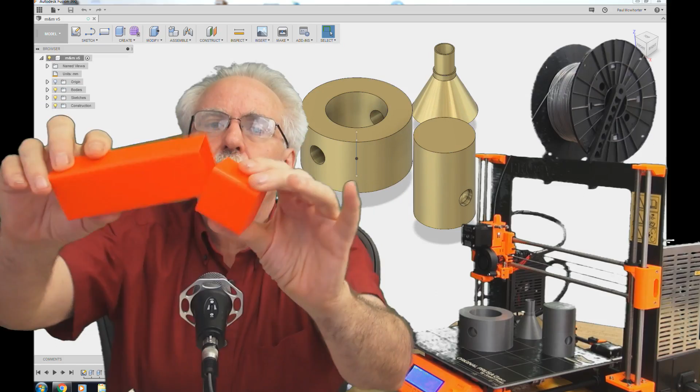What we are going to do today is design our first three-dimensional object. If you were here with us in lesson 1, what did we learn? We learned that the secret of success in Fusion 360 is becoming expert at our two-dimensional sketches. So we're going to work in our two-dimensional sketches and learn some more tips and tricks, and then do our first extrusion to create this excellent eyeglass container with a nice slip fit to protect our eyeglasses. I like this because it's a simple design we can do fairly quickly.

So what do we need to do to start a new design? We need to fire up 360, come up here to File, click on it and say New Design. Boom, we got a blank page to work on here.

Where do we start? We start with a sketch. How do we go to Sketch? We click on Sketch. What do we want to draw? That's kind of like a rectangle, so let's come down to Rectangle, 2-point rectangle.

What is this nonsense? It is asking me what plane I want to draw it on. I'm a math teacher, I'm old school - I want to draw in the XY plane. To me, Z is for thickness and XY is where we draw. X is red and Y is green, so we would click here on this plane, between the red and the green.

Boom! I have got a piece of graph paper and I'm ready to draw. Now we already have the rectangle tool because we did that to take us into Sketch, but if we didn't, we would just type R on the keyboard and it would give it to us. We come near the origin and click once, come out, click again. We now have a rectangle.

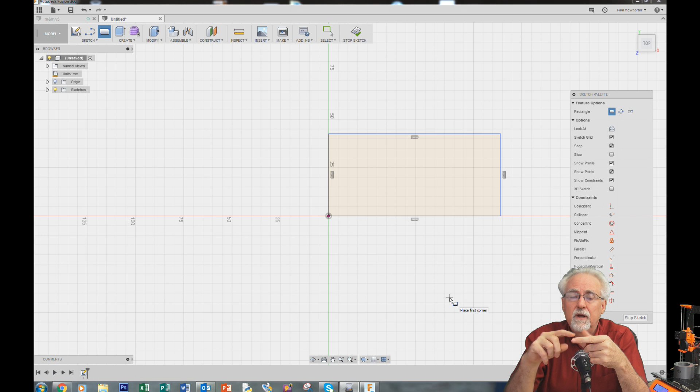The rectangle is in the right position, but it's the wrong dimension. So what do we do before we move on? We set the dimension. We are always mindful of dimension and position. This is in the right position, it's the wrong dimension.

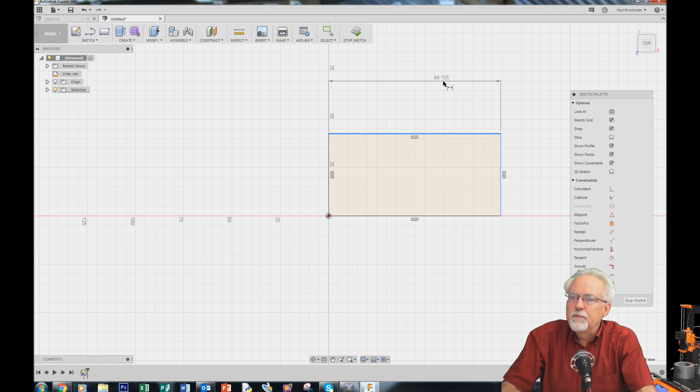So how do we change the dimension? I type D on the keyboard, and now it gives me the dimension tool. I point at this line, click once, pull it up - that does not look right, escape. I click D for dimension, select this line, pull it up, and then I tell it the dimension. The dimension is 42, enter. Now I have a rectangle, it's in the right position.

One dimension is right, what do I need to do? I need to set the other dimension. How do I go to the dimension tool? I can type D on the keyboard, or I could come under here, under Sketch, down to Sketch Dimension, click there. Now I have the dimension tool.

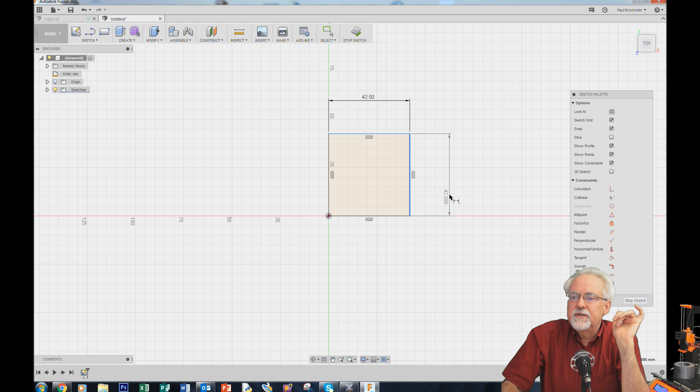What do I do? I point and click at this line, one time. Now I pull it out, and you see how I can move that around? I get it in a neat spot, click again, and now I tell it a dimension, 32. What do I have now? I have a rectangle - it's in the right position, and it has the right dimension.

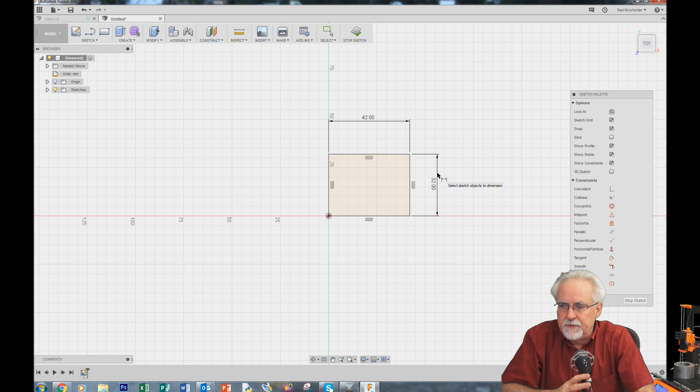This is the starting point of success - I'm mindful of position, and I'm mindful of dimension. Now let's think about this, I will zoom in here. How do I zoom? I zoom with the scroll wheel on the mouse, so I'm going to zoom in to get this nice and big where you can see it. All right, that should do it.

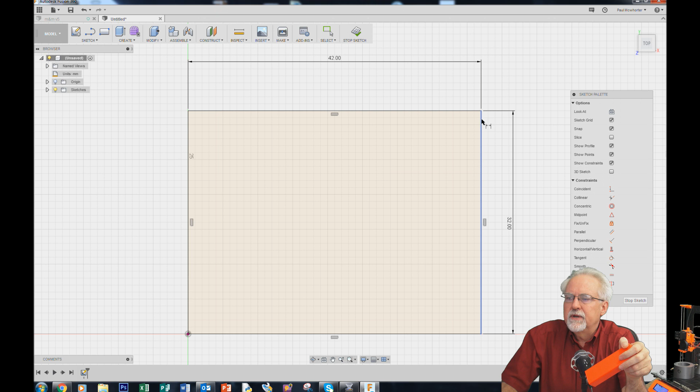Now, would you want a glasses case with a sharp corner on it that might cut your thumb? No, you want it rounded, a nice rounded profile. So how would I round that profile? There's a tool under Sketch called Fillet. Some people might say fillet, I'm going to call it Fillet. So I'm going to choose this Fillet tool.

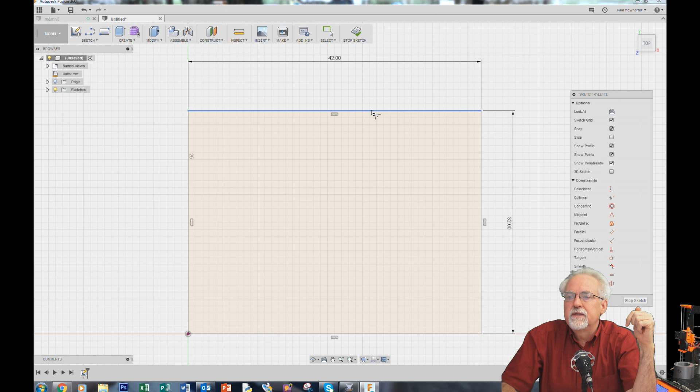Now what do I need to do? I need to tell it the first leg that I want to fillet, it's this one. And then I need to tell it the next leg I want to fillet, which is this one, and boom! It creates a nice rounded corner.

Now if you look in this dialog box, it is asking me for the dimension. We don't have to dimension it yet. Let's go all the way around, and then we will dimension it as a last step.

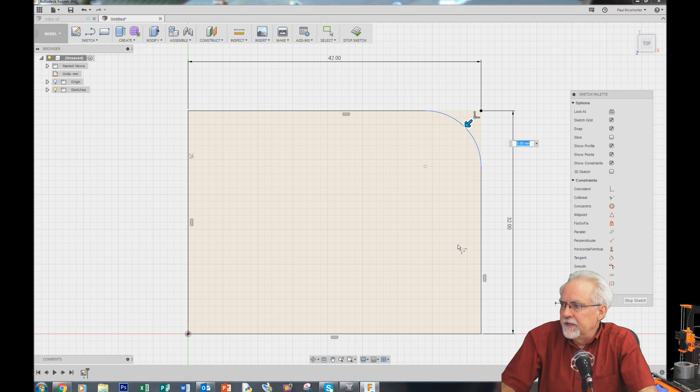So now I am still in the Fillet tool, so I click on this leg, and this leg I click, and now I have a second rounded corner. Now I need to do the third corner. I point at this leg, I click, I point at this leg, I click. I have 3 rounded corners.

Now I point at this leg, I click, I point at this leg, I click, boom, look at that. I have 4 rounded corners.

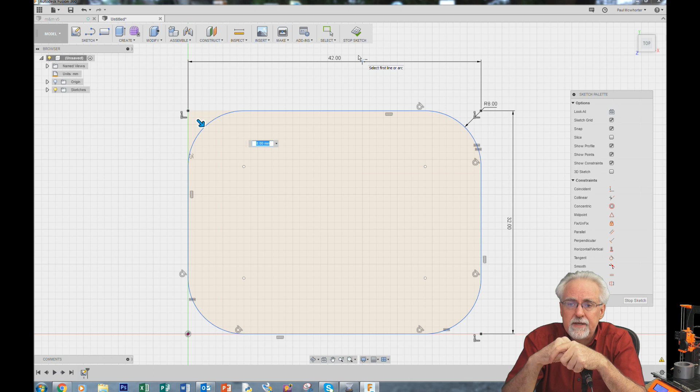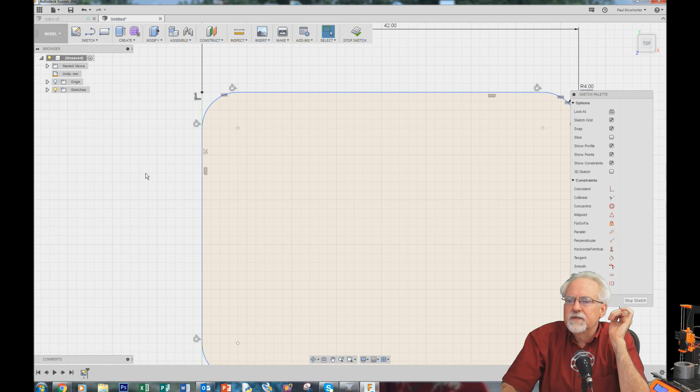Now it's still asking me for a size, and if I look at that profile, it's a little bit too rounded, becoming a little bit too oval. It says that it put an 8mm circle, a radius of 8mm on that curvature. That's a little bit too much. I'm going to try 4, and then I'm going to type enter, and then boom. That really looks nice to me. I am very happy with that, and I think that's a nice profile.

All right, now we've got the base that we need to extrude from, but what we have to think is, how many profiles do we actually have? Well, we have the outside of the whole box, which is shown here.

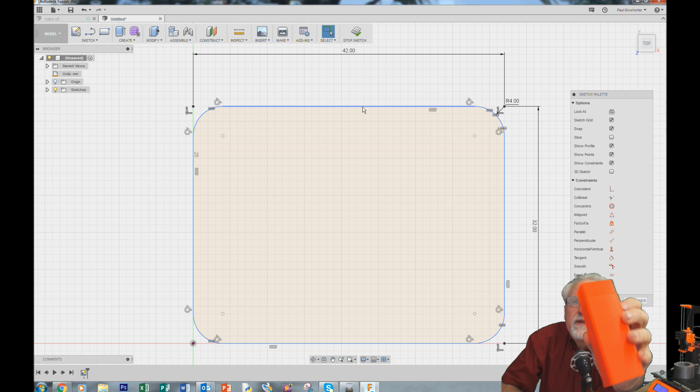We also, do you see that little lip on there? Do you see how we have a little lip? I think you can see it there if I hold it just right. That lip is in 1mm, so we need a second profile that's just basically this one again, but 1mm shorter.

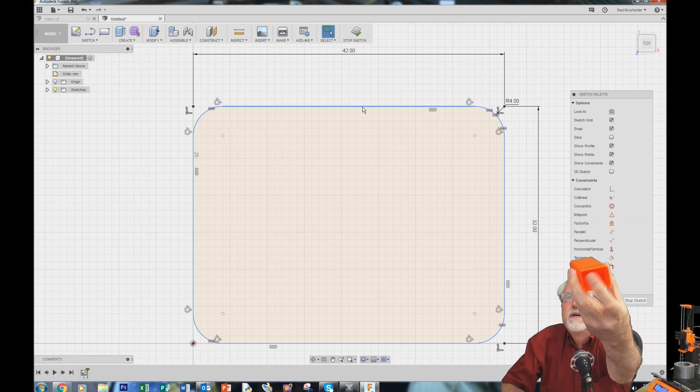And then we have a third profile, which is the entire inside diameter. So I have inside of the whole box, outside of the lip, and then outside of the whole box. So I need this profile 3 times. I have it once. How many more times do I need it? I need it 2 more times.

Now I could come in and just draw the whole thing again, a little bit smaller, but there is an easier way to do it. We come under sketch. We're going to learn something new here. We use the offset tool, so we get offset.

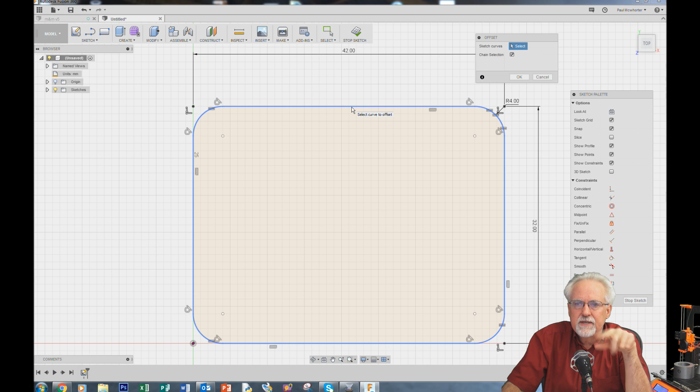Now what it wants is, if you look at this dialog box, it says select what you want to offset. Well, I want to offset this profile. You see when I point at it, it selects the whole circumference. So I click on it, and then it guesses, I bet he wants one 1mm bigger. I don't want one 1mm bigger, I want one 1mm shorter, which would be, instead of 1mm offset, it would be -1mm offset. Click enter, boom, look at that.

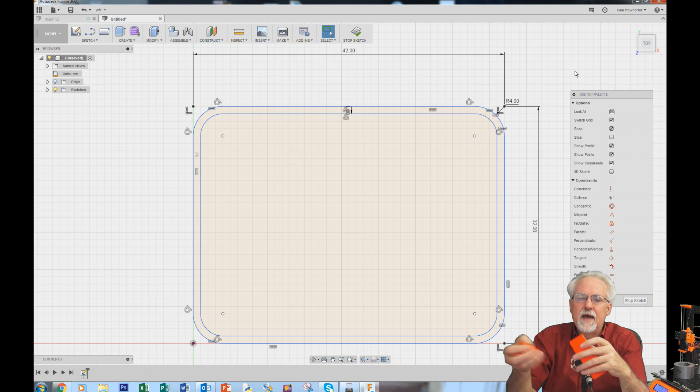So that is kind of like what would be the outside of that lip. Now what do I need? I need the inside. That's offset another millimeter.

Important tip: you would be tempted to say offset from the offset another 1mm, but don't. It's good practice, always go back to the original and offset from that. So you don't want to offset from an offset from an offset. We would want to offset from this original again and offset 2mm.

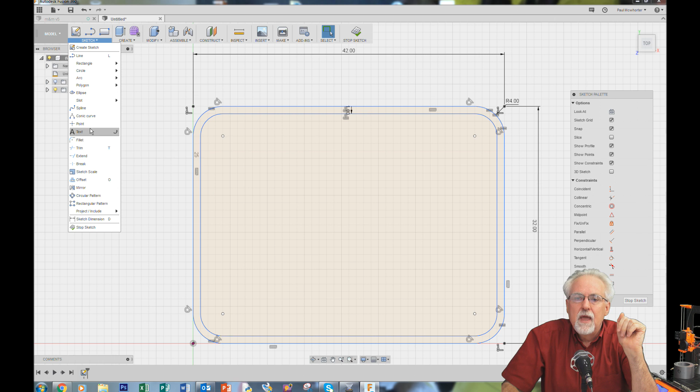So what do we do? We come in and we offset. We select this, and then what do we want to come in this time? -2. -2. Boom. And so we now have the profile that we need to build the bottom part.

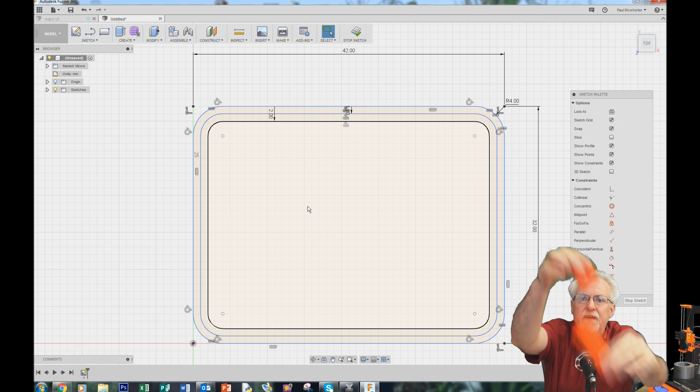Instead of jumping in and just starting to extrude this, why don't we think ahead? We need a top and a bottom. The profile of the top is going to be the same profile. You have the outside, the inside of the lip, and then the inside of the whole thing. So we basically want a copy of this.

I'm going to show you how to copy and paste. We are always mindful of position and dimension. I have all the dimensions, but I need to think ahead that I'm going to have to put this somewhere. So I need to give myself a point to align to.

How do we get an alignment point? The line is your friend. I click on L for line. I come to the origin, I click, and then I come out here and I click again. I need to click the check mark to tell it I'm done drawing a line.

Now I need to click D to dimension that. I want to dimension this, and I think I want to come out about 52. I'm going to click again, and say 52. All right, that looks pretty good.

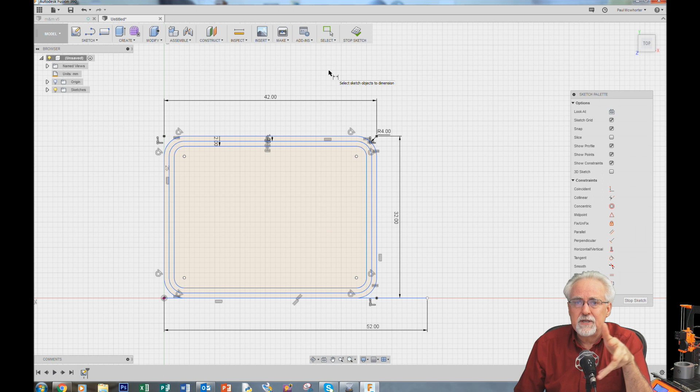So I want another one of these with the corner right here. And also what I have to remember is that line right now is a physical line, like a real object, like a string, an item in my drawing. I don't want it to be an item in my drawing. I just want it to be a guide point, a navigation point, or a construction point. So how do I change that?

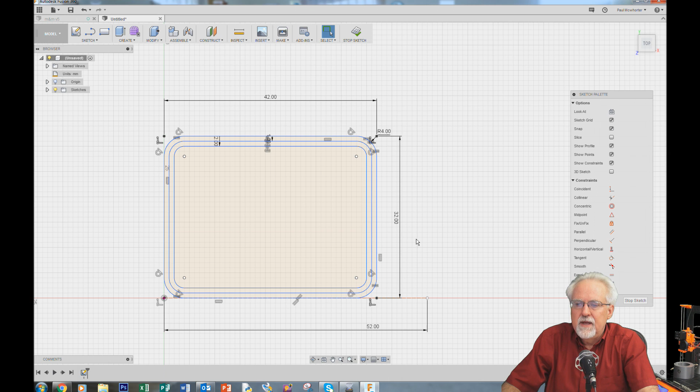I get the selection tool, come down here, right mouse click, and then I want to say it is a normal construction line. Now it makes it a dotted line, and making it a dotted line means that it's not actually there. It is just giving me a marker that I can align to.

How do we copy and paste? I'm going to zoom out and zoom in. I'm going to select the whole thing, click, drag, unclick. Now point at it and right mouse click. What do I want to do? I want to copy it. Now I have a copy.

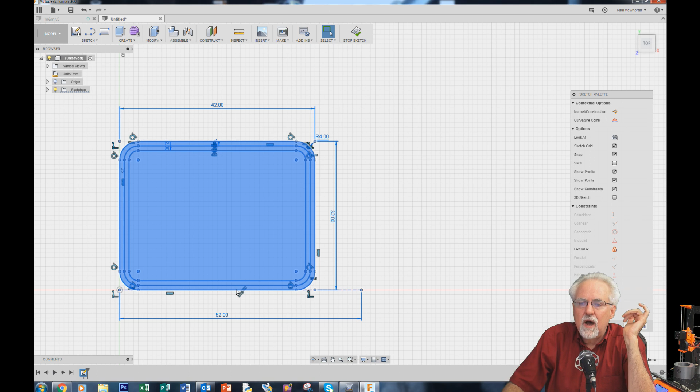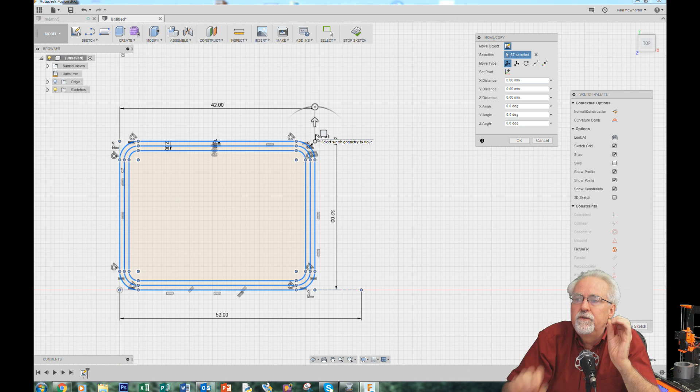I'm going to click off of it. Now right mouse click. I want to come down to paste and click. Now don't touch anything, because it has pasted the new one directly on top of the old one. If you click off of this, you're going to have two that are so perfectly aligned you can never get them separated. So right now it's very important to move them. It says, hey buddy, I gave it to you on top of the old one, but you better move it somewhere else.

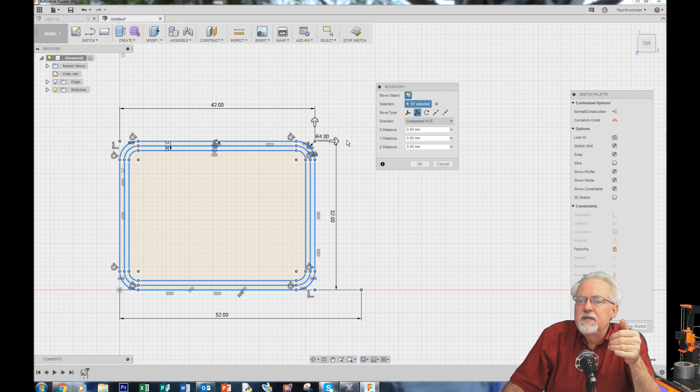Where do you want to move it? Well, I can move it in a free move, a translation, or a point to point. I think I will just move it in a translation, so I'm going to click translate. Do you see how it gives me these nice move it right and left or up and down options? So I'm going to move it like this, then zoom out, move this out of the way, move it again, and keep moving it.

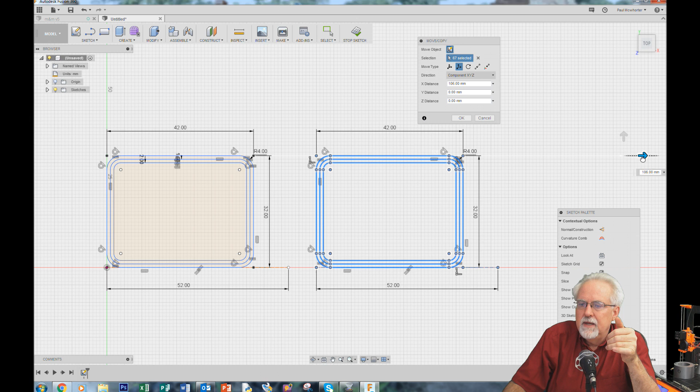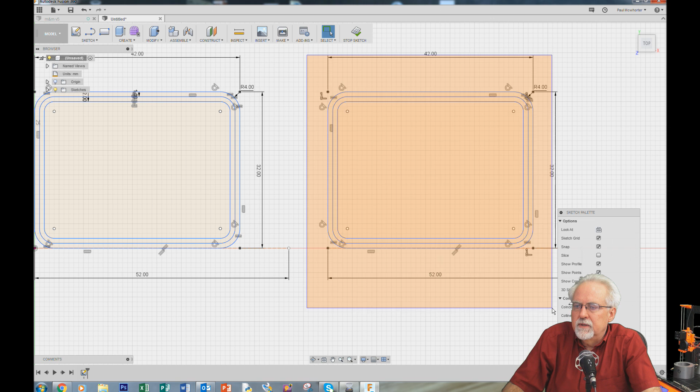It sometimes kind of gets away from you here, but don't worry, there we go. Now it looks like I have this lined up with this. That looks like a great place to put that. Let's see if I really got that. So now you can see I did not quite get that at the point that I wanted. I am going to select it again, right mouse click, and say move.

Okay, I'm going to do a point to point move, and I want this point here to move to this point here. Boom. Now I have it exactly at that point, because I put that point there for a reason, and when I started doing that drag, I kind of ended up with it in an arbitrary position, but now I have it exactly where I want it.

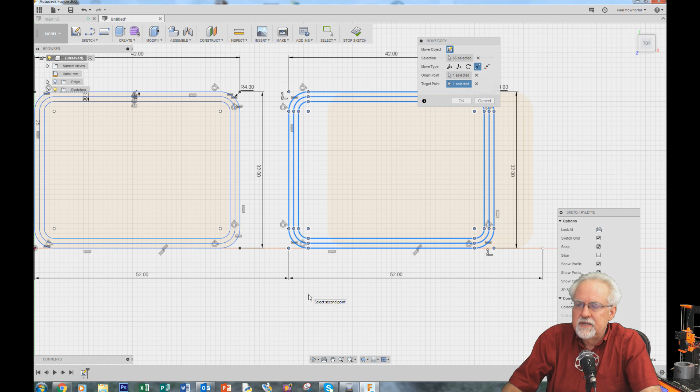I click OK. Now what I could do is come in and start doing my extrusions. But what I want you to see is, it would work that way, but we're learning about how to master the sketch level. So I'm going to show you a tip here. If I came in here and said 32, what's the problem? Now all of a sudden the base is not the same size as the top. Can you see that you would really want the base and the top to be the same?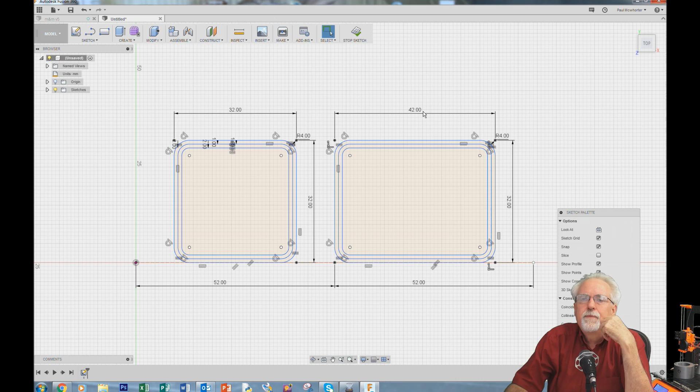And if I change this, you would want this to change. So you would really like these two things tied together. So what I'm going to do is go back and put this at 42. And I am not going to do things the way that I just did them. I'm going to show you a better way.

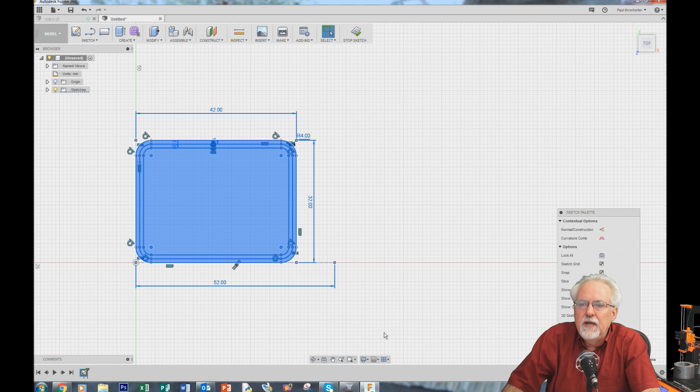So what I'm going to do is come in and select all of this, and delete it. All right, now I'm just back to my original one. What I want to show you is that we can select all of this. We can come under sketch and do a rectangular pattern.

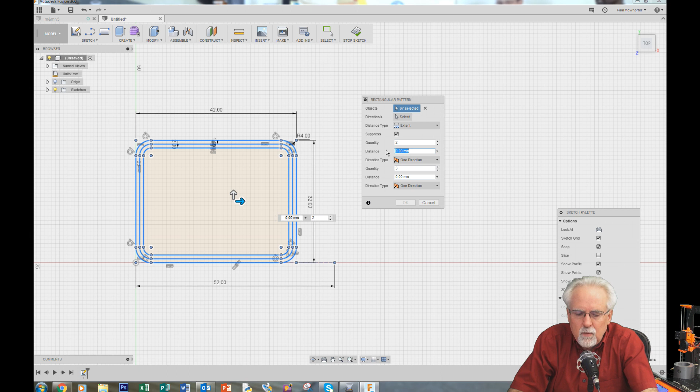This dialog box comes up. It says, how many do you want in the horizontal direction? Well, I want 2 in the horizontal direction. How far do you want to offset this? I think I want to offset it by 52 millimeters. That would put it right where I'd put this point, at 52. I tell it 52 there.

Now this is lined up with this, so I'm just being deliberate about position. And then it's asking how many do you want in the vertical. Well, I only want 1 in the vertical because I want 1 here and 1 here. That's all I want. Okay, and now I click OK.

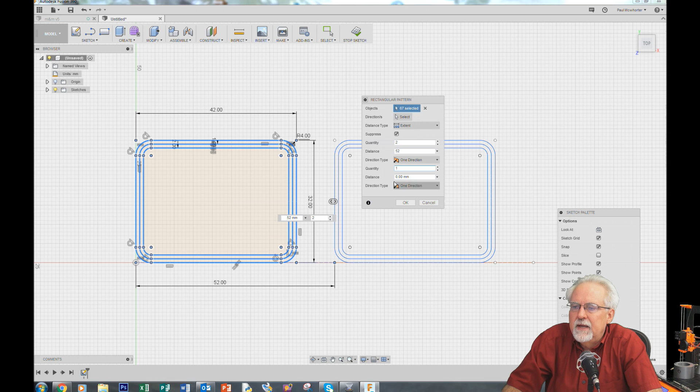All right, now what do I have? I have this one, and now I have this one. What do you notice about this one? It doesn't have any dimensions. Why? All the dimensions are tied to this one.

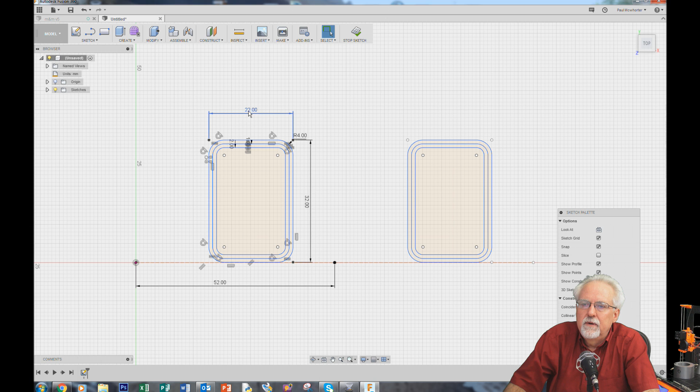So if I come over here and say 22, look at that, it changed both of them. If I come here and say 42, it changed both of them. What if I come in and say 12? Fixes both of them. What if I come in and say 32? Fixes both of them.

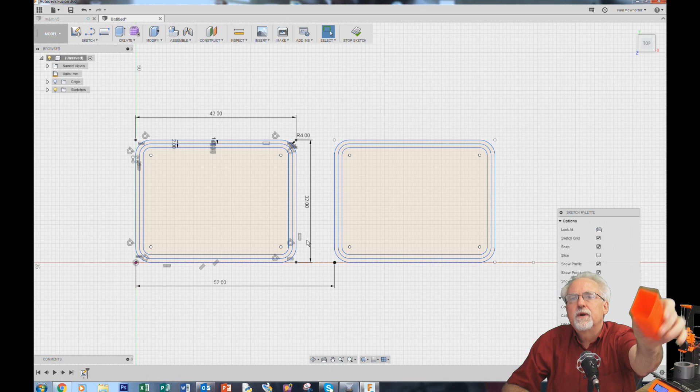Now what's nice about that, if you save this file and later you want a different dimension, you just change that one dimension and everything else is going to change. Because if you see, I set the outside dimensions to 42 by 32. This inside one was not set as an absolute dimension, it was set as an offset from the outside one, so those changes propagate through in a way that you don't have to redesign the whole thing. So this is very nice.

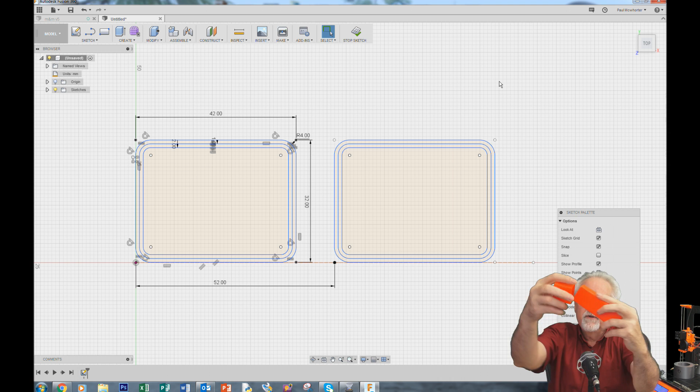Boom, we are where we need to be. I've got two profiles, one for the bottom and one for the top. What are we ready to do? We are ready to start extruding. And so how do we extrude? We come under here at Create, and then what we want is this Extrude tool.

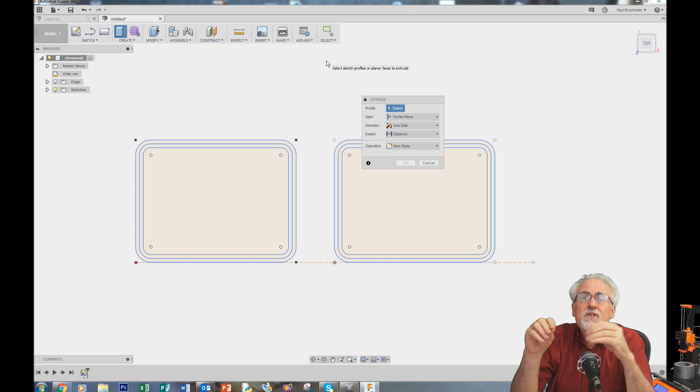Okay, so now it is asking me, what do I want to extrude? Well, first of all, I want a little bit better angle to look at this. So I want to orbit a little bit, rotate a little bit. How do I do that? I get the Rotate tool, I click, I come over here, and I rotate where I can see this. I like that. Now what I can do is right mouse click and say OK. Now I am back to my extrude menu.

It was just like I ran over there to get a better view.

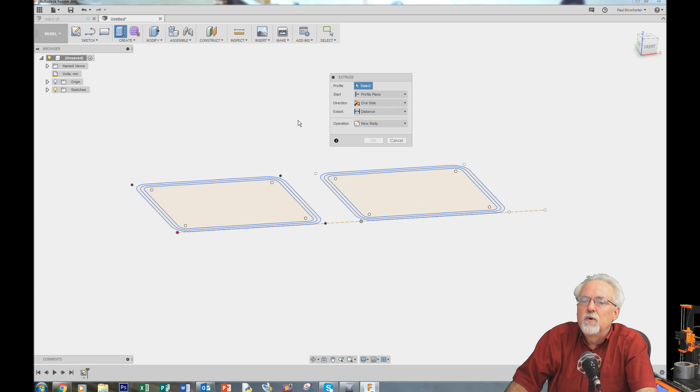So it wants me to select what I want to extrude. I'm going to select this. How thick do I want that? I want that to be the bottom thickness of my glasses holder, and I want the bottom thickness to be 2 millimeters. Boom, there it is. Now what you can see is that, wow, I got that, but I lost my sketches.

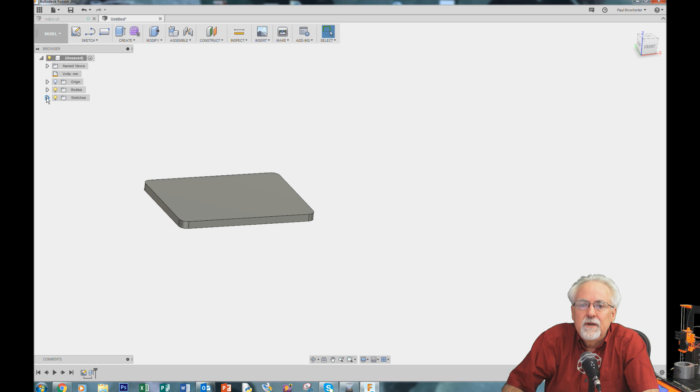Where did they go? Come over here and look under sketches. You see the light bulb? It turned them off. We're going to turn them back on. So you see, again, this is one of those things you get lost—it's like my sketches disappeared and then you look for 3 hours for them. You can turn your sketches on and off, you can turn your bodies on and off. I'll leave the body on, but I want to make sure that that sketch is on.

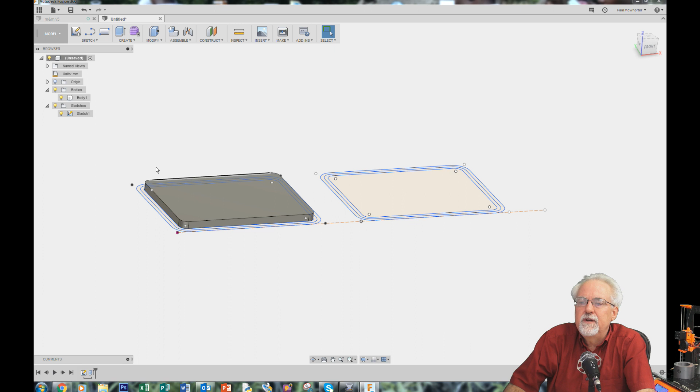So under sketches, I've got sketch 1. Now what do I want to do? I'm going to finish this one and then I'll come and do this one, but I want to extrude this. So what do I do? I hit Create again, and then I want to select what I want to extrude. I'm going to zoom in to make sure that it gets it. Boom, I want to extrude that.

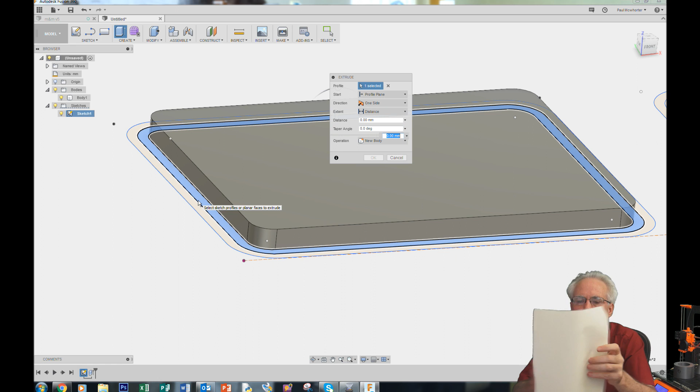That is the bottom part, and the inside of the bottom, if you look at this, is going to be 120. On my design it is 120, so I'm going to type in 120. Boom. Now let's scroll out. Okay, now look at that—that is 120, that looks great.

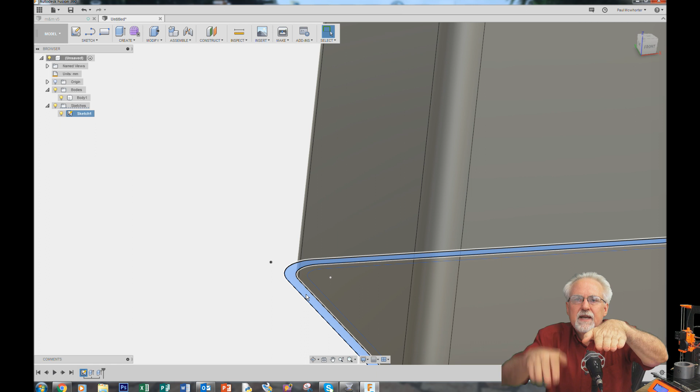Now this outside one isn't 120, this outside one is just 100. So the outside's like this, the inside's 120, and that creates that lip. I click on that, I say extrude, and that one is going to be 100. Enter. Alright, so now let's back off.

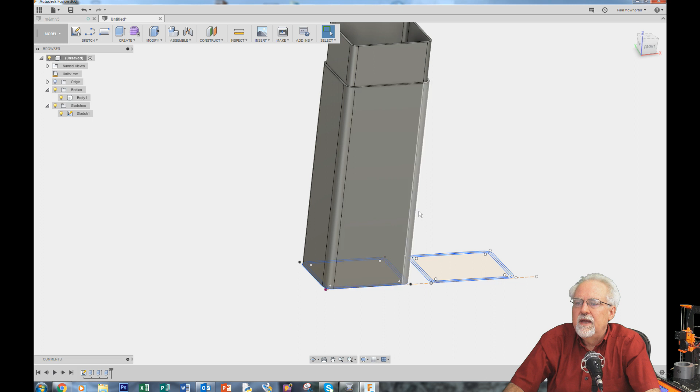Let's back off and look at that. You see, I have that and I have that. So you can see now why I needed all three profiles. This is the inside, this is the lip, and this is the outside. And there we have it, the whole thing. Now I'm going to rotate around a little bit, kind of take a look at it. Look at that, that is very nice.

Now you see, sometimes you can kind of get lost rotating and then have trouble getting it back. If you ever do that, come up here, and if you just click the little home thing, it gives you a nice 3D perspective.

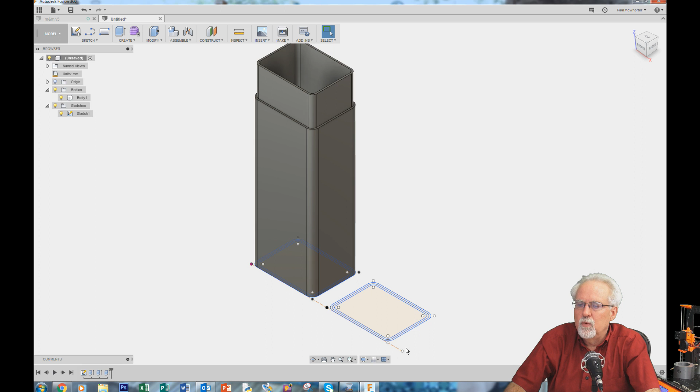Now what do I want to do? I want to sketch some more. So I come back here, and then I'm going to click on this, and then what do I want to do? I want to extrude. So I come up to my Create and go to Extrude. And then I come here—how thick was this supposed to be? This is supposed to be 2. So I say distance is 2. Enter. Look at that.

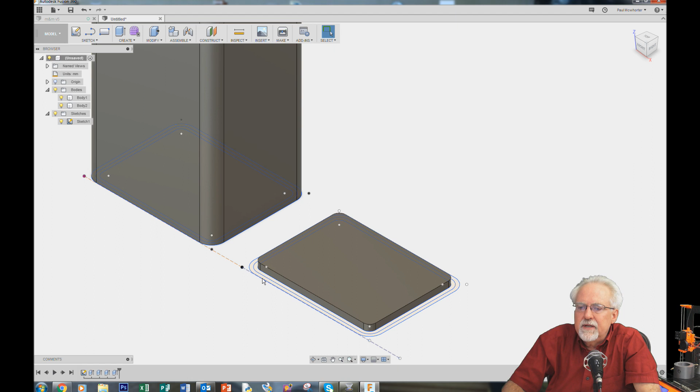Now, if we look at my design, I'm designing now the top part. Now, I could extrude this, or I could extrude this. The problem is, if I extrude this, then it's going to be very hard for me to extrude this because I've hidden it. So I want to go ahead and extrude this.

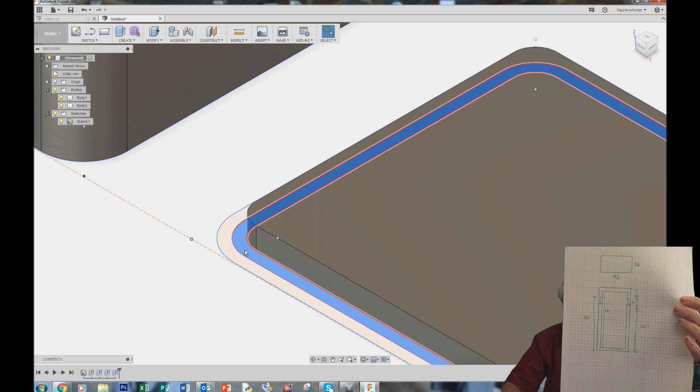And in this one, if you look at it, that is going to come down. That is going to come down on the inside just 20. So this one's going to come up 20, and this one's going to come up 40, and that's going to create that 20 lip again.

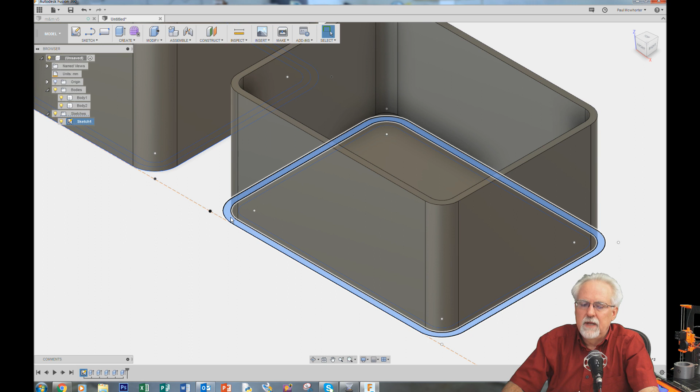So this one I click on, and I click Create, Extrude, and how far do I want that to come up? I want it to come up 20, enter. Okay, look at that. And then this one, select it—I'm going to just click extrude here. And then how far did we want that one to come up? 40, enter. Oh man, look at that.

So I'm using the scroll wheel to scroll in and out. I think I'll go over here, down here, and look at that. I'm going to use the orbit tool to kind of look down in it.

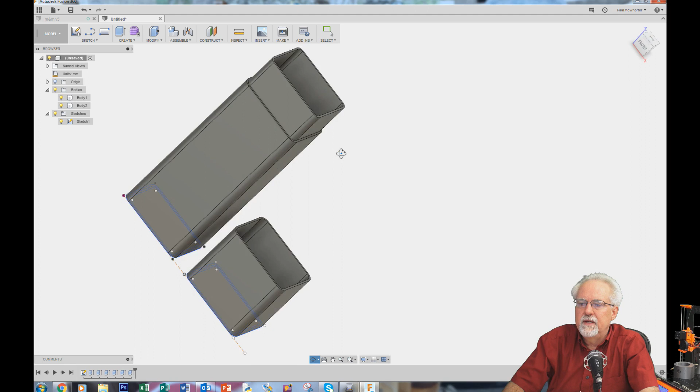Man, that looks just beautiful. Okay, let's come back to our home view to get it like that. Now really you can see that right now we would be ready to print.

We could just take this and send it to the printer, but we want to learn a little bit here. One of the things I want to show you is, what if you made this and then wanted it to be a different dimension? Where would you go back to? You would go back to Sketch.

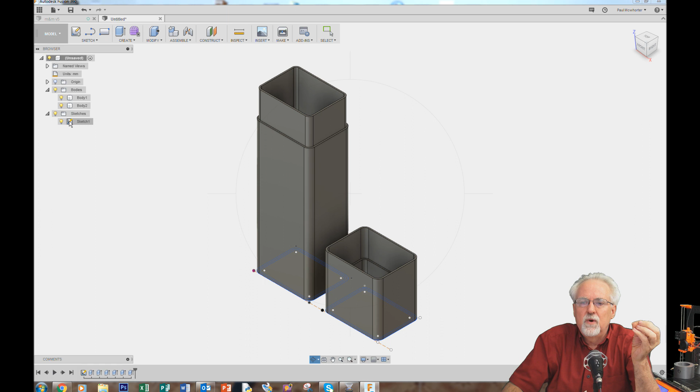So what you can do here is you can just come in and say sketch like a rectangle, and then again go to that plane that you were on. And no, that's not really a good way to do it, because what did I just do? I just created a new sketch plane.

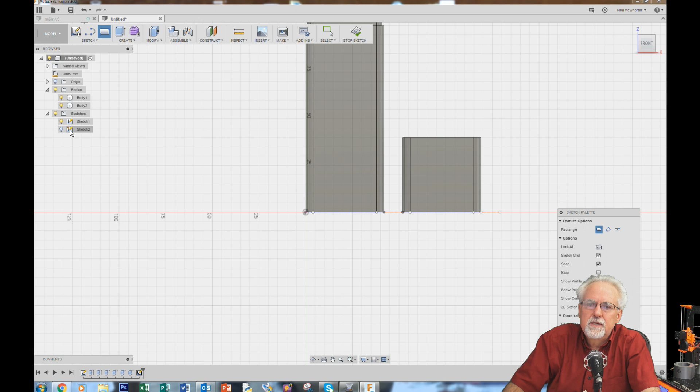Let me see if I can turn this off, select this. Man, that sketch plane, oh okay, I'm sorry, I got to get out of it first. So stop sketch, I come here, and I should be able to delete it. Okay, so now I deleted that sketch plane. That was really kind of sloppy what I just did.

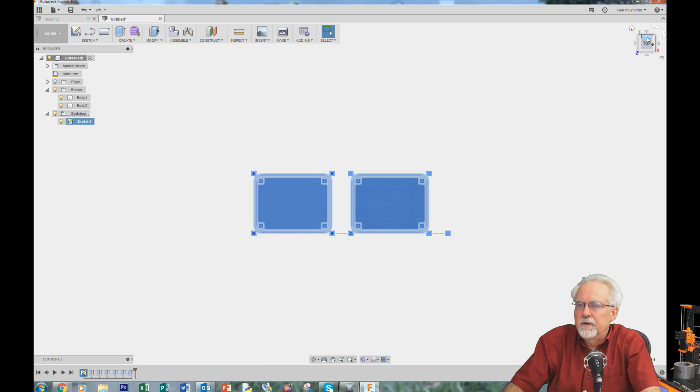So let's come here and let's choose this, and then let's go to top. Okay, and now we are looking at our sketch plane. And now if I come in and I say sketch a rectangle, 2-point rectangle, now it takes me back to my sketch view. So I don't really want to make a rectangle, but I'm just trying to get back into this sketch thing without creating a new sketch.

And that's the mistake I made the first time I created a new sketch, as opposed to just coming back to this one. But now we are back here. What if we wanted to change this? I could say select, and I could come in and say I want this

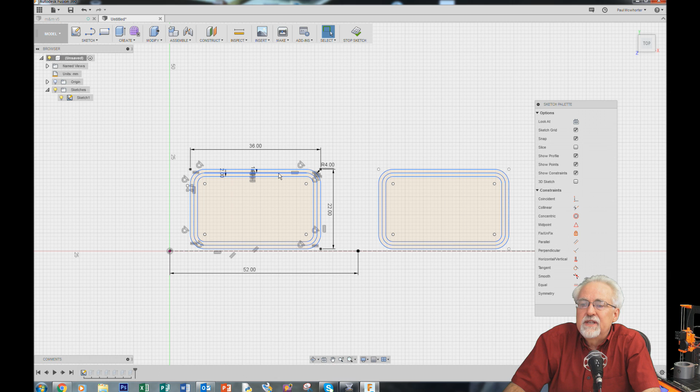36, enter. And then I want this 22, enter. Do you see what it did? When I changed the outside one, it changed, it's still offset, but now it's offset from 36. It's still offset, but it's offset from 36.

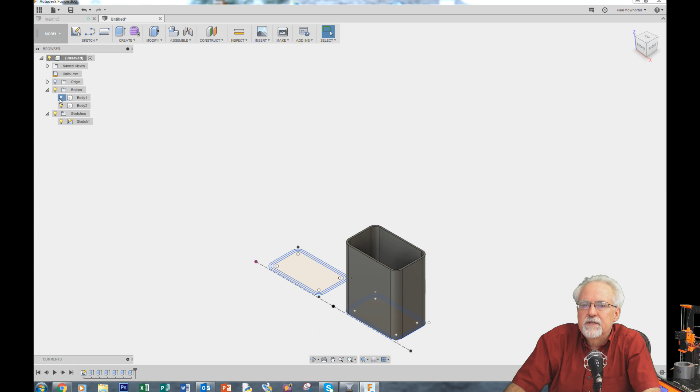And then all of those changes propagated over here. So now if we go back and we look at, we close this, okay, stop sketch. We go back and we look at our bodies. Okay, and let's go back and look at home. And I think this is probably 2 bodies. Yeah, you see that's one body. That's the other one. So the light bulb is what you're looking at and what you're not looking at.

So I have one sketch, but I have 2 bodies, and so they're treating the 2 bodies differently, which is okay. Do you see now how I have changed everything? And if you're using a tool that doesn't have this parametric capability, think of how everything depends on everything else. But because we designed this, being mindful in the sketch of our relationships with things, changing the dimensions was very simple, because we had them interrelated.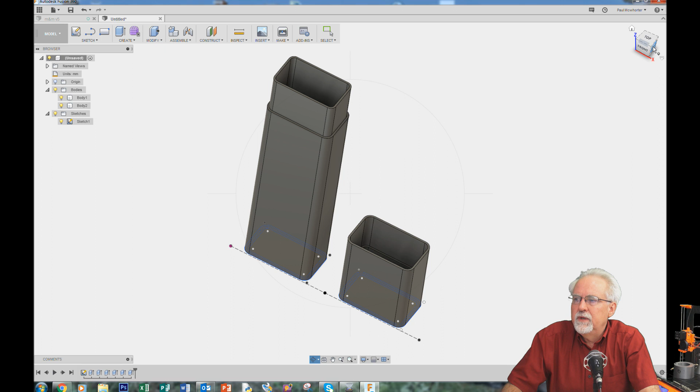Let's see if we can go back to sketch now without having that nonsense that we had a while ago. Okay, so what do we do? Let's just go to the top. Okay, and then I'm going to select this, and then what I'm going to do is I'm going to get out of my tool, and then let's see if I just come in and select something. Okay, so let's say that I want to sketch a rectangle, 2-point rectangle, and now I am back here where I need to be.

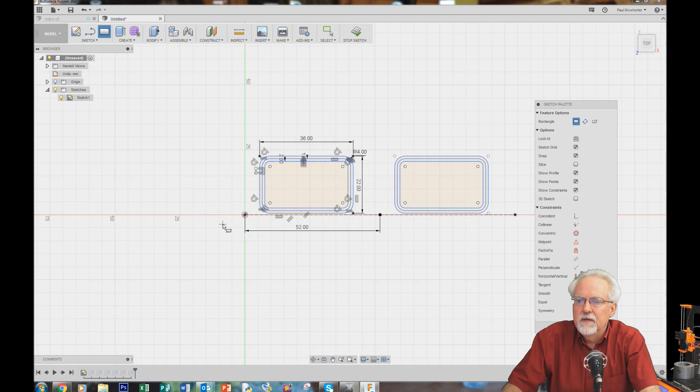Okay, so that made those changes. I want to make it back to the original size. All right, so what do? I'm going to select, I'm going to double click on this, and I'm going to say 42, enter. Okay, and then I'm going to double click on this, and I'm going to say 32, enter. All right, and now I am back to my original shapes.

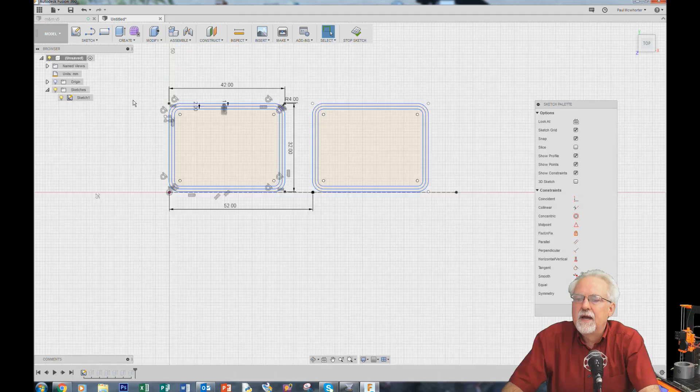Let's look and say stop sketch. Okay, and I want to make sure that you can see that the stop sketch is right here, or it's up there. So stop sketch. Okay, let's go back and let's rotate it around where we can see the bodies, and that looks really great. So how would I do, what would I do in order to print this?

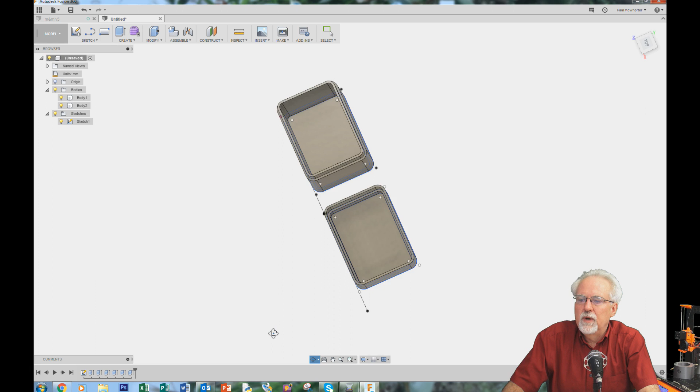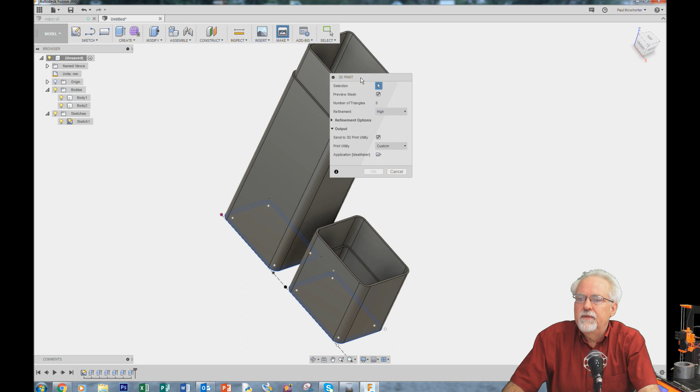Well, I could come over here, and under File, I could say 3D Print, and then where do I want it to go to? I'm going to send it to, I have this set up for high, and then I say send it to 3D print utility, the custom one that I want to send it to, I have pointed this by clicking on the folder. I pointed it to my Raise 3D printer software, which is ideaMaker. So at this point, I think all I need to do is just select this, okay, and then I can say okay, and then it sent that over there.

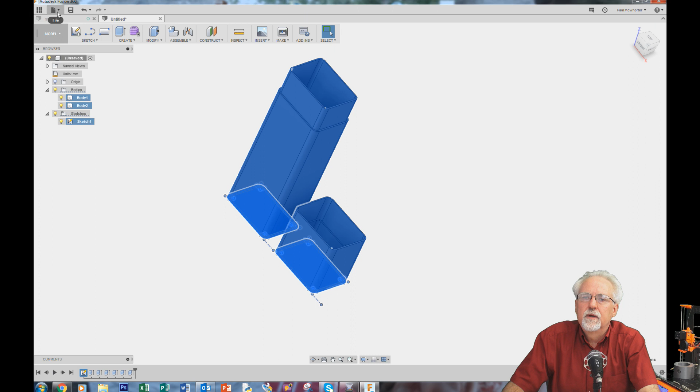You would need to select them both, and probably, let's see if we can figure out how to do this. Okay, let's select them both, and then we come over here to 3D print, and then we have that going there, and then say okay, and boom, we end up in ideaMaker with the STL file in here. Let's rotate it around a little bit. Let's make it big, and then let me see if I can rotate it around, and look at that.

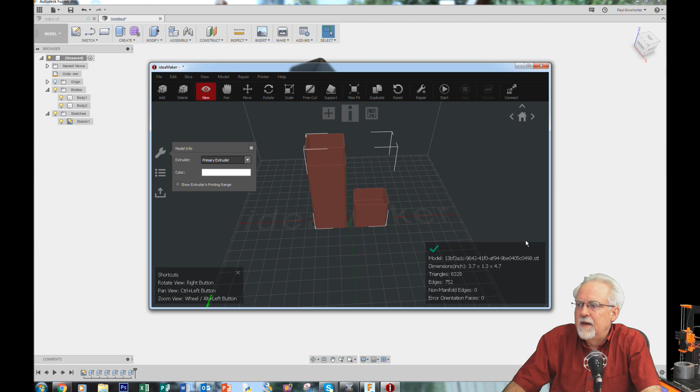Okay, what else makes me really happy? It came in with no errors. That is the beauty and the elegance of Fusion 360. It really generates good surfaces. It generates real solid, and you notice that it came in correct. I do not even have to try to repair it or fix it or anything. It is ready to print.

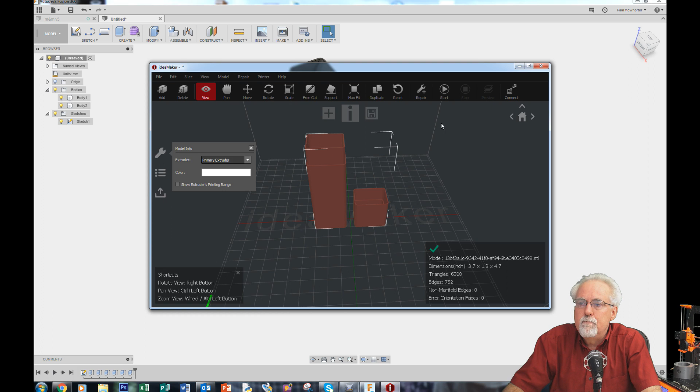And so what I would do on the Raise 3D printer, I would hit connect, and then I would hit print, and I will do that, and I will come back in just a minute. So you guys just hang on, and I will be back in, well, for you it's going to be a second, but for me it's going to be several hours.

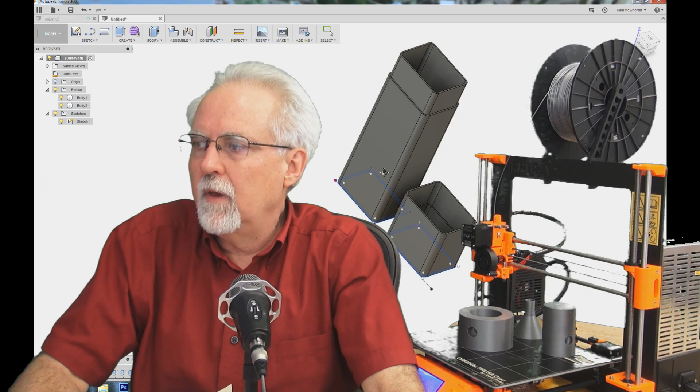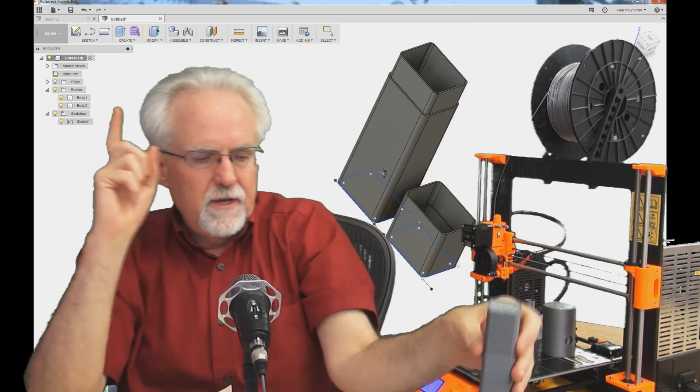Okay, I am back, and I have printed this item out, and I will show it to you. Let's see if I can move this where you can see it a little better. We like the hand. We move the hand over here. Okay, and now what do I have? Look at that. I guess everything's backwards, but look at that. Just like it is. Just like it is. Boom. Nice fit. Congratulations, you have made your first design in Fusion 360.

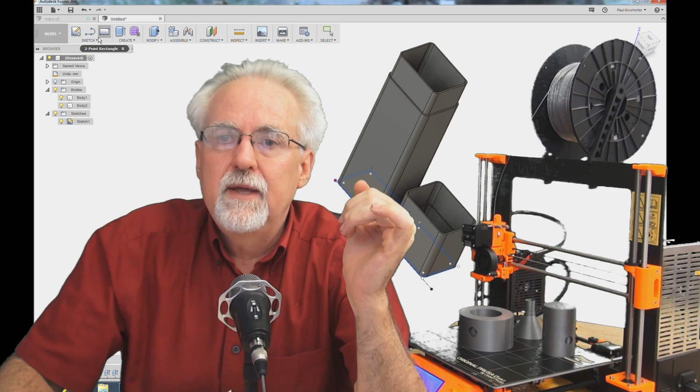I told you that we were going to learn this, or we were going to die trying. What have we learned so far? We've learned that the battle is won or lost in the sketch level. You're going to win the battle or you're going to lose the battle at the sketch level, okay? And what you have got to do is be very, very careful to work in that sketch level, and be very mindful of dimension, and be very mindful of position, and also think about the relationship between the different parts. What we've learned about so far is dimension and position. You win or lose the battle in the sketch level, in the 2D level.

The other very important thing that we're going to learn in the next lesson is you win or lose the battle not just on position and not just on dimension, but on constraints. And constraints are the reason that people just throw their hands up, hit their head against the wall, run from the room crying, fold up like a cheap lawn chair. But what we are going to do next lesson is learn how constraints work. And if you learn how constraints work, you will love Fusion 360. It will be your friend. You will not get frustrated with it. But most of your problems in Fusion 360 are not understanding what the constraints mean.